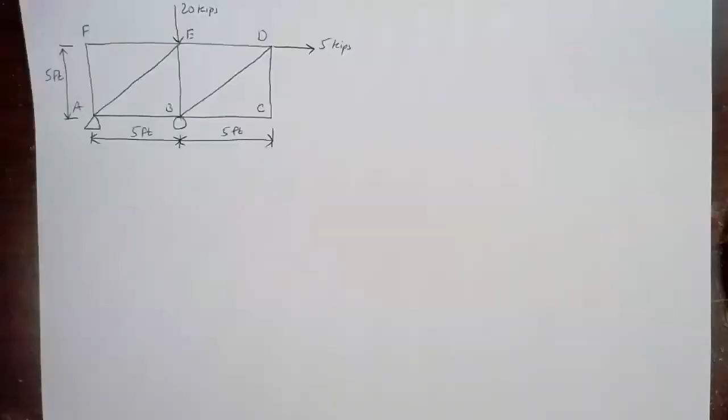Now, this kind of truss we've got set up with our supports in maybe different locations than you're used to seeing. Usually we see one support on one end, one support on the other, but the supports can be anywhere. That was part of the lesson of the 2 problems I had on last Wednesday's practicum. Here we've got our roller support in the middle, and that's okay. The pin support and the roller support will hold that truss even though we have this cantilevered section, a section that is sticking out beyond the support, and that's okay.

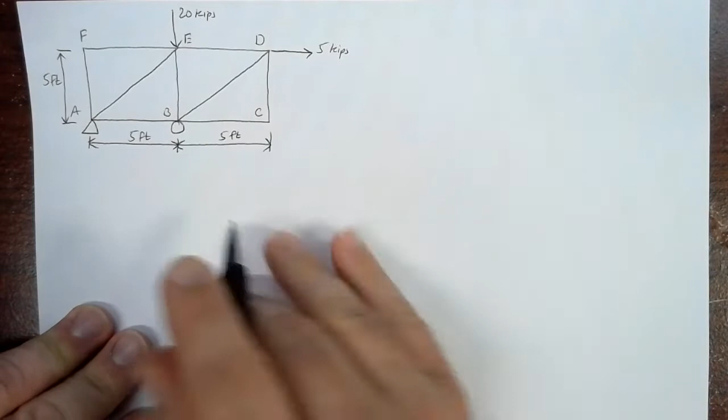We analyze it exactly the same way. Now there are a lot more joints than we have had in other truss problems, but we'll find that several of these members are going to be unloaded. And we'll be able to, by picking the right joints to go to in solving our method of joints, make pretty quick work of the problem.

So first, let's solve the external problem by drawing our free body diagram. So in our free body diagram, we're going to have the truss repeated again.

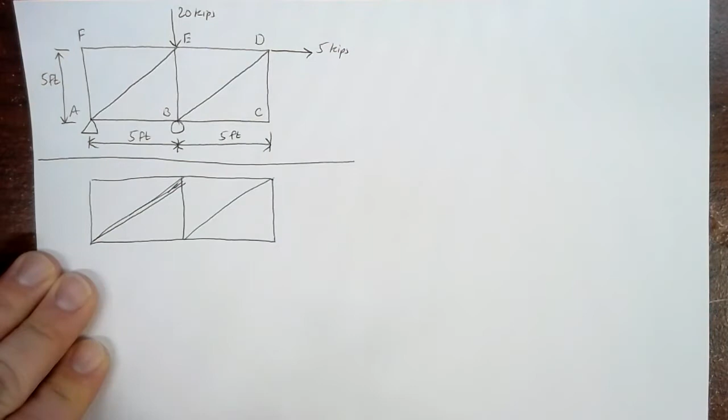But we're treating the truss as essentially a solid object. We are not worrying about the internal structure at all. All we have to worry about are the external forces, the fact that that pin support supplies 2 forces, RAX and RAY, and that the roller support supplies a single force, and that we have these 2 external forces.

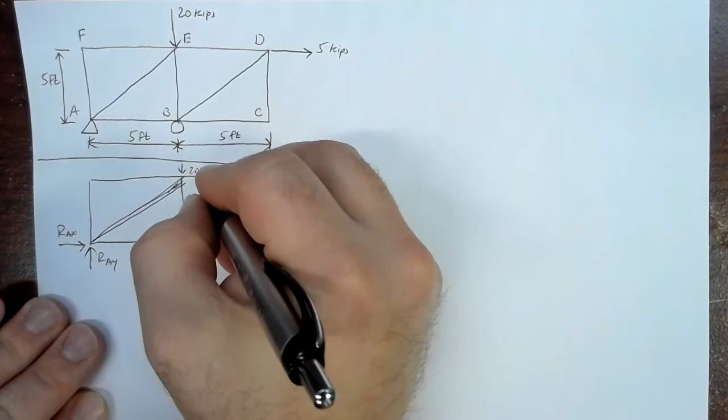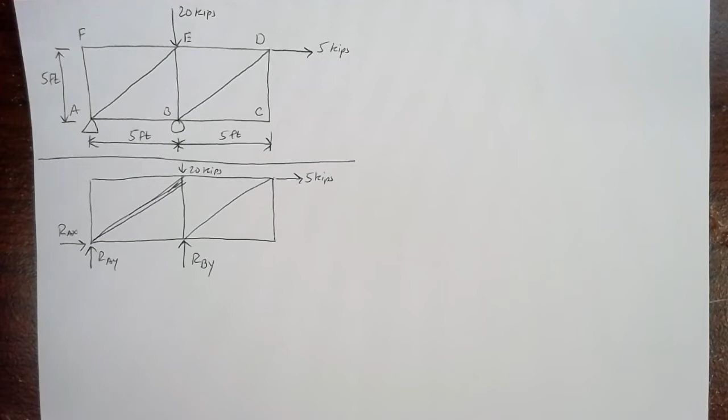We have the 5 kips pulling to the right, and we have 20 kips pushing down. Those are all the external forces. We'll figure out the internal forces, the forces on the members, when we look at the actual joints.

So let's do our external problem. This is a non-concurrent force problem, so we have 3 sums that we can work with: the sum of forces in the x direction, the sum of forces in the y direction, and the sum of moments about a point.

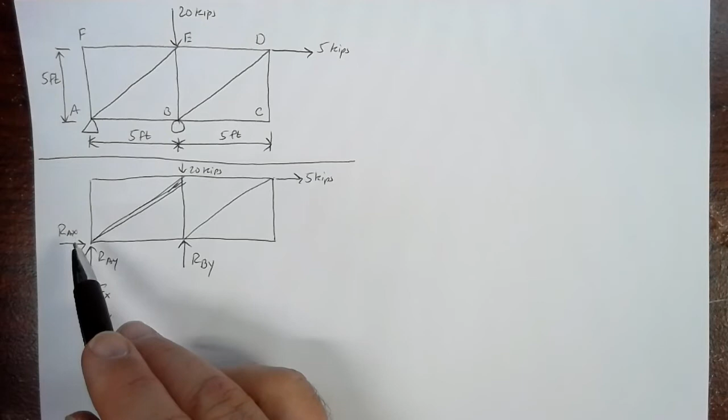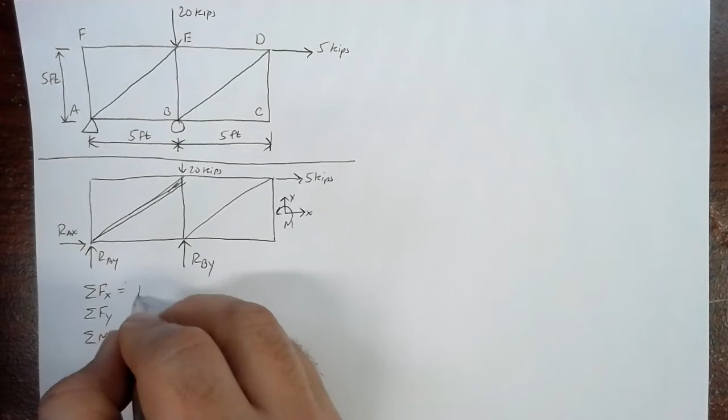For our sum in the x direction, looking through the truss carefully, we've got RAX to the right, and we can define our coordinate system to make sure we're clear on our directions for positive. X is positive when it's to the right, Y is positive when it's up, and counterclockwise moments are positive. So a force in the x direction, we've got RAX, and that's to the right, so it goes into the sum as positive. The only other force in the x direction is this 5 kips, and that's also to the right. So we'll put that in as a +5.

In the y direction, we've got RAY up, so a positive RAY. We've got RBY up, so a positive RBY, minus 20 kips, because that 20 kips is pushing down.

And then we've got to find our moments, and in order to find the moments, we need to pick a pivot point. Joint A is, again, not a bad choice to pick. One of the supports always works out to be a good place to pick your pivot point. A works out nicely because it means that RAX and RAY will generate no moment. We're only going to have moments from 3 forces. RBY has a moment, the 5 kip force has a moment, and 20 kip force has a moment. So let's work each of those in turn.

Let's take the 20 kip first. That 20 kips has a line of action that is 5 feet away from A. So its arm is 5 feet times 20 kips. The 20 kip force acting alone would cause everything to rotate clockwise, and clockwise moments are negative. So we have a negative 5 feet times 20 kips.

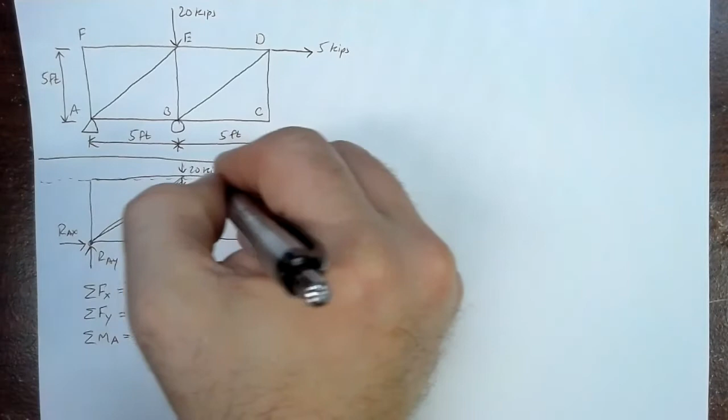The line of action of the 5 kip force is that horizontal line right there. That distance between the pivot point and the line of action, measured at a 90-degree angle, is 5 feet. So we have a 5-foot arm for that 5 kip force.

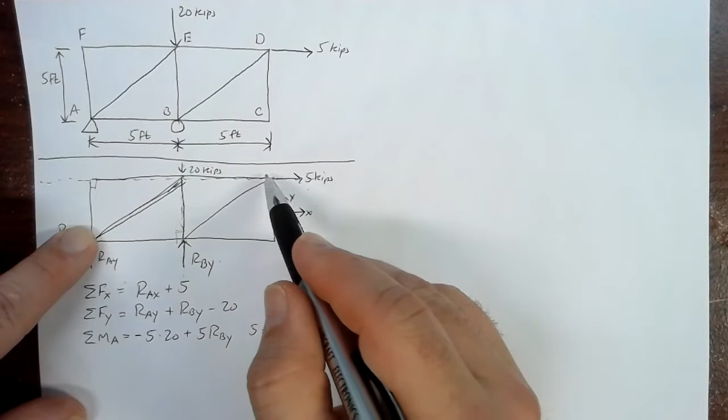Acting alone, if we pin the truss at A and pull with the 5 kip force, that would cause a clockwise moment, and clockwise moments are negative. So there we've got our sums. Now, if this truss is in equilibrium, the sums add up to 0, which gives us a set of equations we can solve.

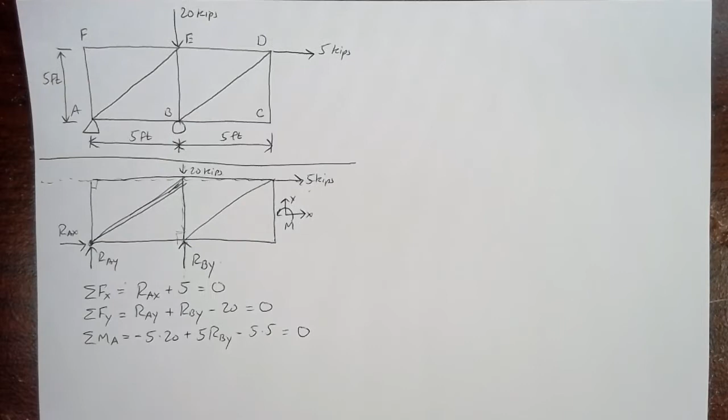So let's shift this up a little bit so we can solve those equations.

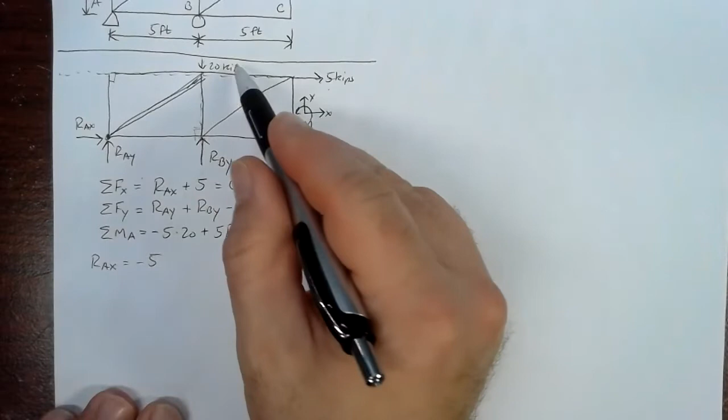Going to the x direction equation, we've got something relatively easy to solve. We subtract 5 from both sides, and that tells us RAX equals negative 5. Don't forget your units, since all of our forces are in kips. In this problem, we'll use kips.

Now, something important to notice here: this came out negative. That means we assumed the wrong direction for RAX. I assumed in my free body diagram that RAX was to the right. The fact that it came out negative tells me my assumption was wrong, that I should have assumed it was to the left. So that just means I've got 5 kips to the left. So up in my summary, I'm going to write RAX is 5 kips to the left, using a left pointing arrow to represent that.

The y direction equation we really can't solve just yet because we don't know RAY or RBY. But we can solve the moment equation. Let's run the numbers on it first here.

Negative 5 times 20 is negative 100, plus 5 RBY minus 25, that equals 0. If we combine the numbers, we get 5 RBY minus 125 equals 0. If we add 125 to both sides, we get 5 RBY is 125, and dividing both sides by 5, RBY comes out to be 25.

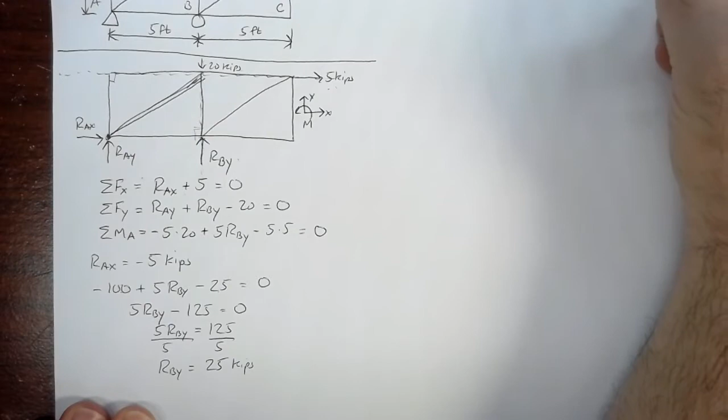So RBY is 25 kips, and that is positive. So our assumed direction for RBY is correct. I'll add that to my summary table: RBY is 25 kips up.

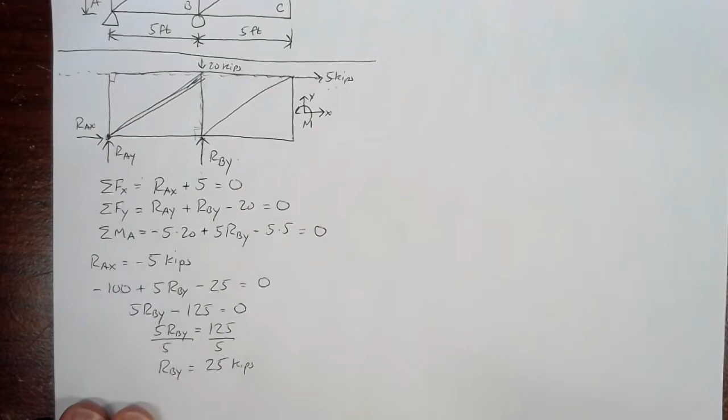Now that we know RBY is 25, we can go back to our y direction equation. We had our x direction, we had our moment equation, now we've got our y direction equation. It says that RAY plus RBY minus 20 equals 0. If we plug in that RBY is 25, we have RAY plus 25 minus 20 equals 0.

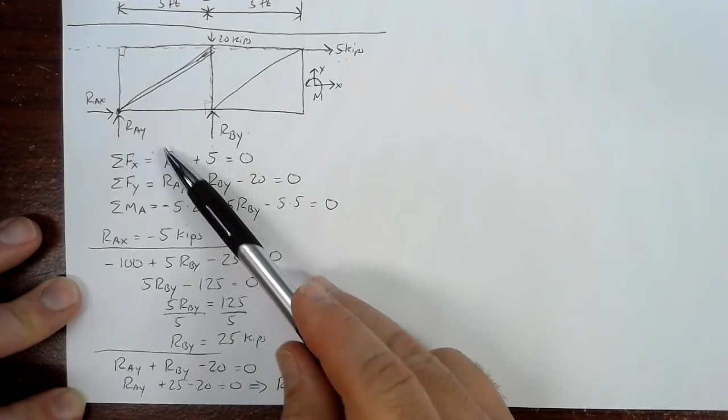If we solve that, 25 minus 20 is positive 5. Subtracting 5 from both sides, RAY comes out negative 5 kips. That means our assumed direction for RAY is wrong. We assumed that the reaction at A had to point upward, pushing the truss up.

But in reality, it's got to pull downward. That's the effect of this 5 kip force over here. This 5 kip force is trying to rotate everything around B, and that's causing this end of the truss to try to rise. The support has to pull down to keep the truss from moving.

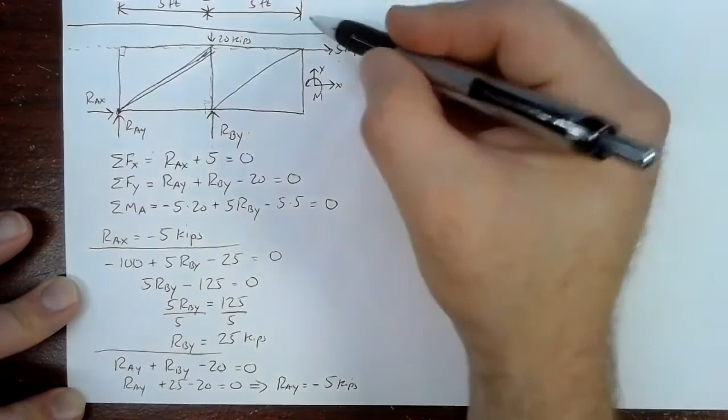Think about this kind of like a long diving board. You've got two supports, a pin on one end and a roller in the middle. Somebody stands on the end or pulls on the end. The pin support has to pull down to keep everything from rotating around B. It'd be even worse if I had a force pushing down out here. So RAY should be 5 kips down. I'll write that in my summary, which I'll show you in just a second.

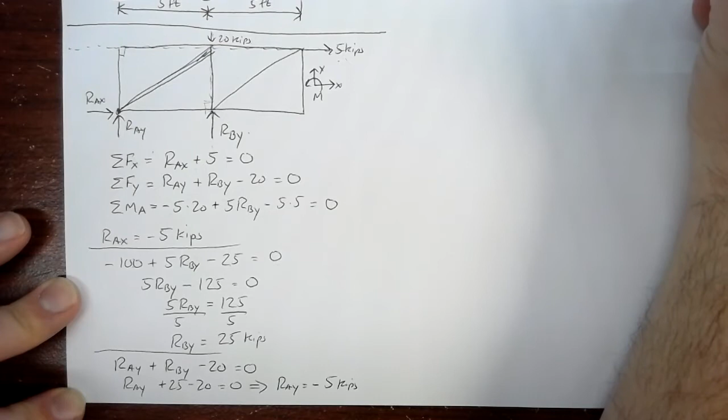So scroll back over here. There's my summary in the upper right corner. I've got my reaction forces from the external problem. RAX is 5 kips to the left. RAY is 5 kips down. And RBY is 25 kips up. So there's our external problem.

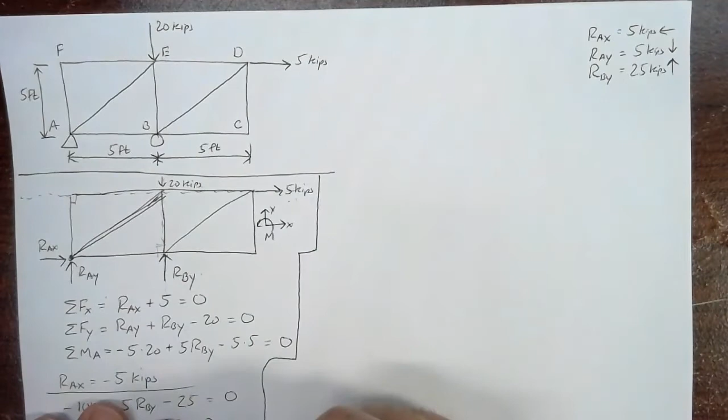So let's line that out. Now our goal in the end here is to be able to fill out a table showing what each of the members experiences as a load and whether that member is in tension or compression.

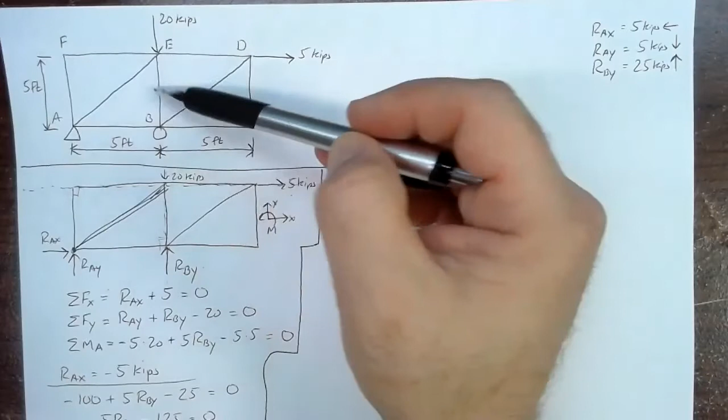Now we've got to count up how many members we've got here to be able to write up our table. Here we've got 1, 2, 3, 4, 5, 6, 7, 8, 9 members. So that's a pretty intense truss. There's lots of members to deal with there. We've got 9 rows in our table. So let's write up the table here.

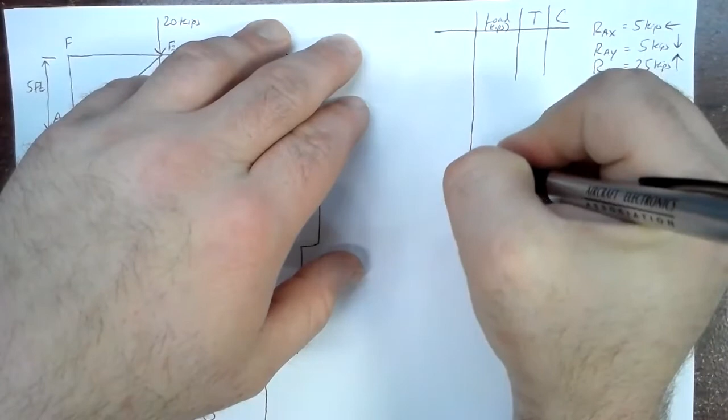We need to know how much load there is in kips and whether or not we've got tension or compression. And we need enough space for 9 rows. Couple more.

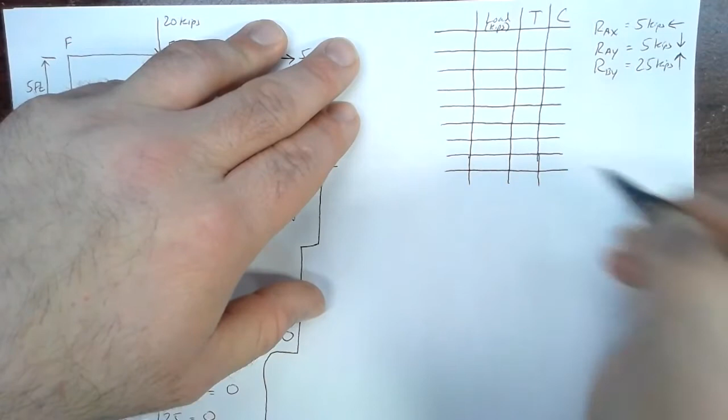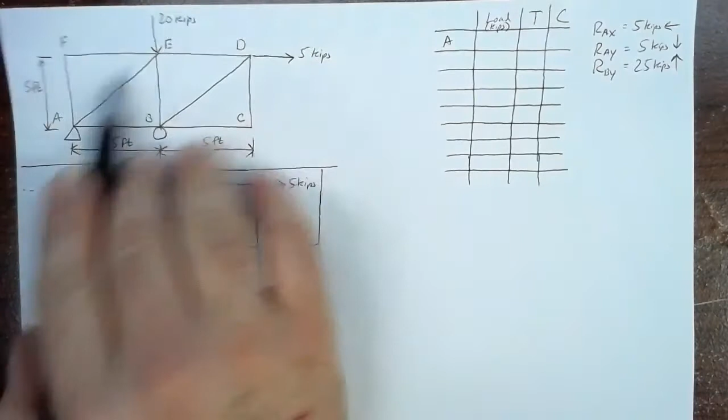We've got to label out our members, and I like to just go in alphabetical order, so I'll start with A. Now A connects to B, E, and F, so I'll have AB, AE, and AF. No more at A, so I'll go over to B. B connects to A, but we've already got that. We've got BE, BC, BD. So BC, BD, BE.

And then we go over to C. We already got BC. We need CD. At D, we've got DE. And then at E, we've got EF. So there we go, all 9 members.

So that's what we're going to want to fill in here at the end.

So we figured out the external problem. We know what's going on outside the truss in terms of its supports. And it's not a bad idea to be really clear about this at this stage before you jump into the truss and start working on the joints. Redraw this free body diagram over here, but fill in the right directions and the right sizes for your reactions. So I'm going to do that here.

I've got the original truss, external forces, 20 kips and 5 kips. And then, according to my summary here, I had 5 kips to the left and 5 kips down. And I had here at B, 25 kips up.

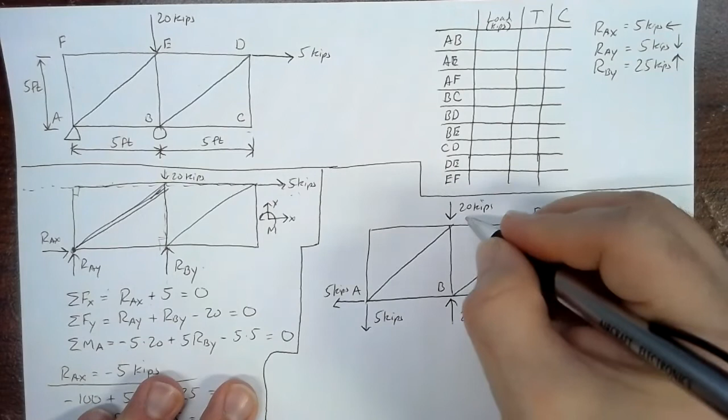That way we've got a good look at what's happening at each joint, filling in all the information that we've got to this point. That'll help us in making our free body diagrams of the joints.

So in method of joints, once we've figured out the reactions, we need to look at the truss on a joint by joint basis. But remember that at a joint, we can only handle 2 unknown quantities. Now, your initial instinct is probably to try to start at A, but there's a problem with A. Although we've got 2 known forces acting at A, we have 3 unknown forces. We can't handle 3 unknowns at a single joint.

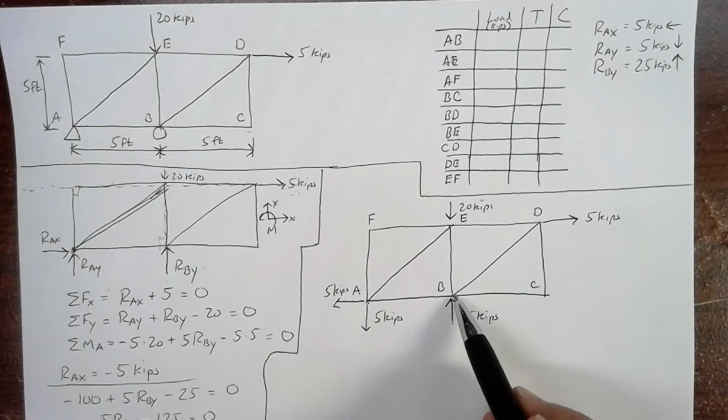We can only handle 2 unknowns. So you might say, well, okay, I can't do A, so go over to B. Well, B is even worse, because although we have 1 known force, we've got 4 unknown forces. D and E are the same. We've got more than 2 unknowns. The only viable places to start on the analysis of this truss will be at joint C and joint F, because those are the only ones that have 2 and exactly 2 unknown forces.

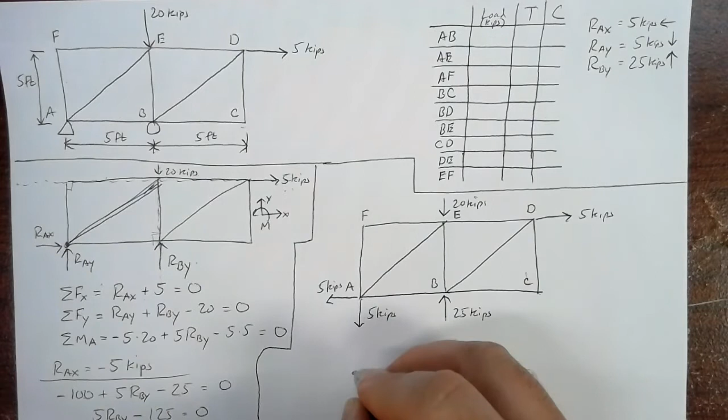So let's start at C. So we'll draw the free body diagram of joint C. So we'll label that here, joint C. And I'll scroll up a little bit here to bring more of it into view. So joint C, it's right here. Draw that little bubble around joint C. Anything that crosses that bubble needs a force in the free body diagram.

So we've got 2 forces here. We've got the force due to member BC, which I'm going to assume is pushing joint C to the right. Sometimes if you're not clear, or not sure what the direction of the force will be, just take a guess. It doesn't matter really in the end. The math will tell you if you guessed wrong by giving you a negative answer. Negative answer just tells you you've got your direction wrong.

Then we've got joint or member CD. And I'm going to assume that member CD is pushing down. And that's it.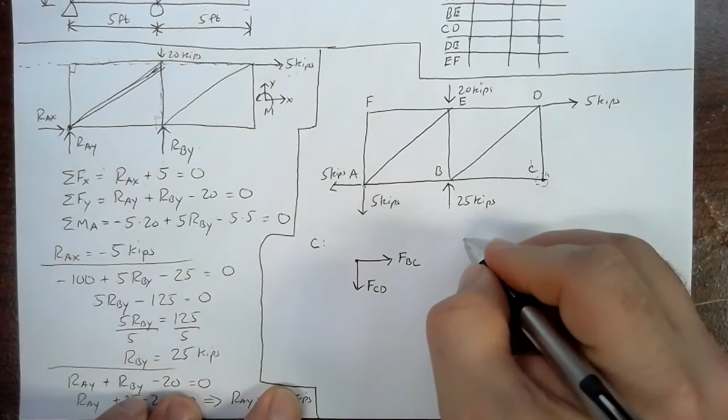Now at a joint, we have a concurrent force problem, so the sum of forces in the x direction and the sum of forces in the y direction are 0. So let's work them out. Sum of forces in the x direction, we have FBC and nothing else. The sum of forces in the y direction, we have a negative FCD and nothing else.

In equilibrium, those sums must be 0. It's the only way we can have equilibrium. Well, that gives us immediately what our values must be for members BC and CD. Since those are the only forces acting in the x and the y direction respectively, and those must be 0 to be in equilibrium, each force must be 0. The only way this picture could be in equilibrium is if those forces were 0, because there are no forces to counteract them. That means that member BC and member CD both carry no load.

You might ask, well, why bother having them in the truss at all? Well, under this particular situation, they aren't doing anything. We could actually delete them, cut them away from the truss and not have any problem. But there might be other loadings where those truss members are important.

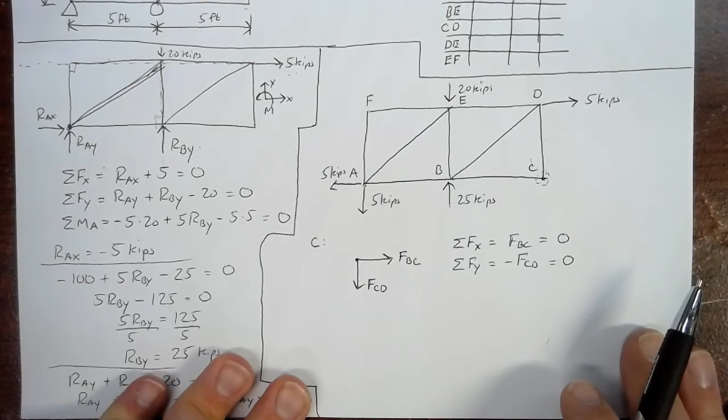Those are 0 whenever there's no load applied at C. But if we happen to be able to apply a load at C, that will change the loading in members BC and CD. So just because a member shows up with no force doesn't mean it will always have no force in all the possible applications of that truss.

So let's go back to our table here now that we've figured that out. Member BC carries no load, so we can put that in there. And if a member carries no load, you can't really say whether it's in tension or compression. Member CD also carries no load. So that's the analysis of joint C.

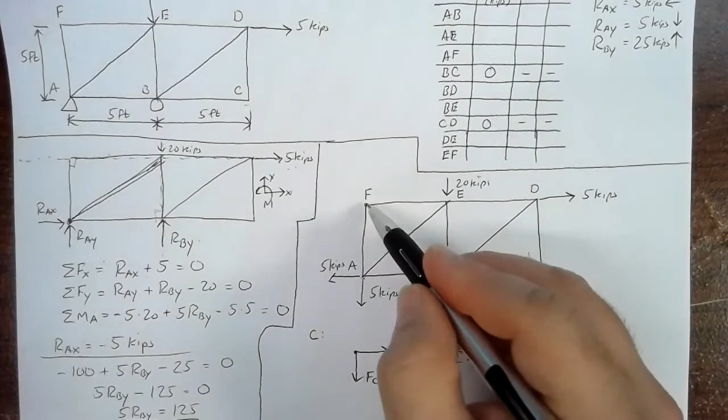Now, if you got the idea down here with joint C, you might see that joint F is going to work out basically the same way. At joint F, we have two unknown forces. One's either pushing or pulling up or down. The other is pushing or pulling left or right. When we draw the free body diagram, we're going to end up with something like this, which means that member AF and member EF will also have no load. So we can fill that into the table as well.

So right away, 4 out of our 9 members have no load on them. That also helps us out as we move on to some of the other joints.

For example, if we go back to joint A now, we only have 2 unknown forces because member AF doesn't have a load on it. We already know what that is. We can essentially remove it in the free body diagram. All we've got as unknowns would be member AE and member AB. So in drawing the free body diagram of joint A, we're only going to have 2 unknown forces.

We will need that angle, but fortunately that angle is not too hard to find out. If we use this right triangle here and notice that we've got 5 feet up and 5 feet over, inverse tangent of 5 over 5 is going to be 45 degrees. So the angle's not too bad to worry about.

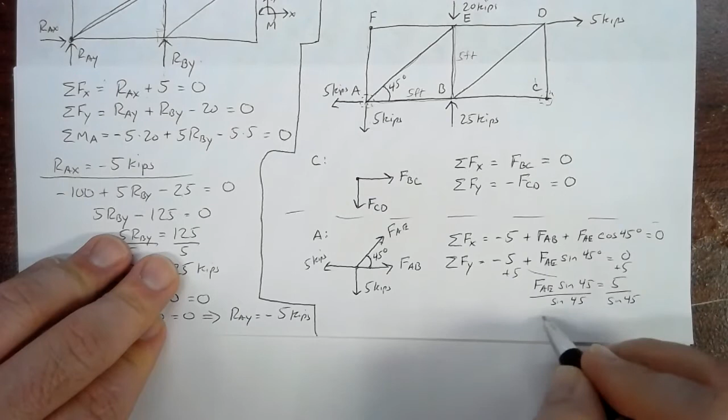And FAE has a value of 7.0711 kips. So FAE came out positive, which means our assumed direction is correct. And that'll be important in a few seconds when we figure out whether this is in tension or compression.

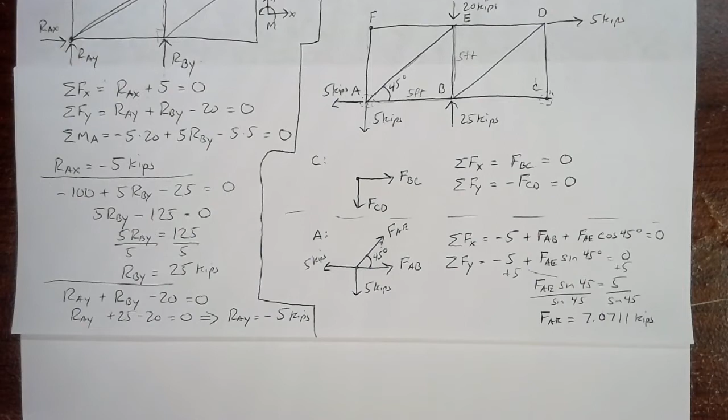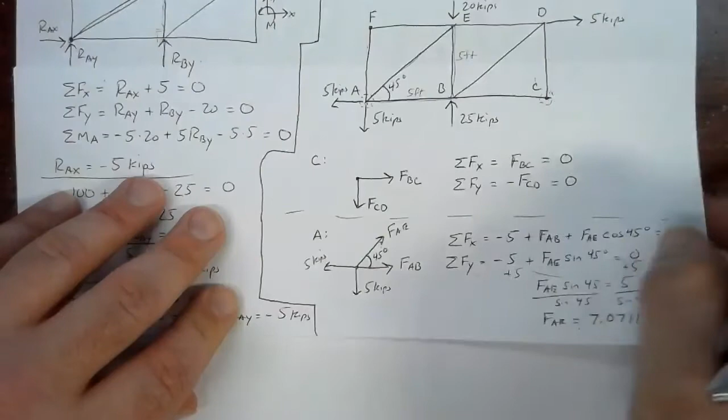Now that we know AE, we can go back in and figure out what value we have for AB. So let's go on to another sheet here.

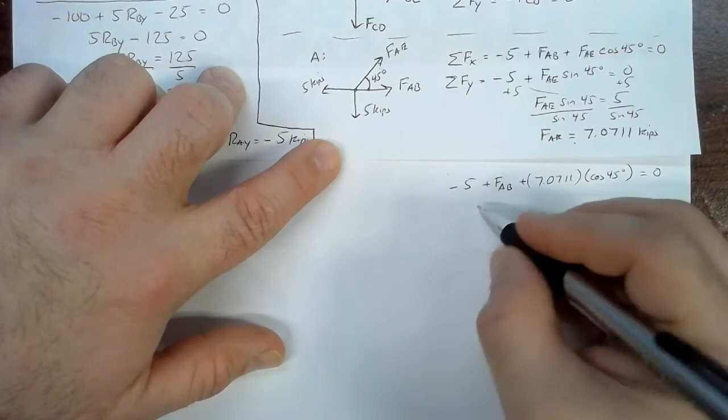The sum of forces in the x direction, we had -5 plus FAB plus 7.0711 times the cosine of 45 degrees, and that equals 0. So if we take 7.0711 times the cosine of 45, that gives us 5.0000. So we have -5 plus FAB plus 5.0000 equals 0. And here I'm keeping 5 sig figs in the calculation.

That'll give me enough to have 3 good sig figs in the end for my final summary. You have -5 plus 5, that's 0. So FAB ends up being 0. Member AB in this loading doesn't carry a load.

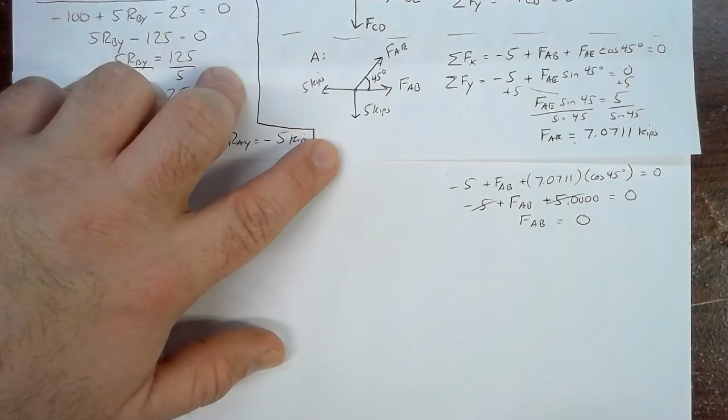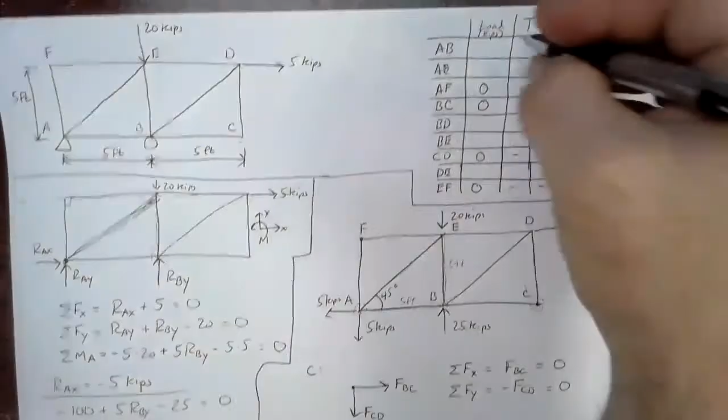So let's go back to our table and fill in what we know. Member AE carries a load of 7.0711. We have to figure out whether that's tension or compression.

Well, the way to figure out tension or compression is to look at the force in relation to where the member is. So if we look at joint A is right here. Member AE is up and to the right. So I'm going to sketch that in kind of like this. Member AE is up and to the right.

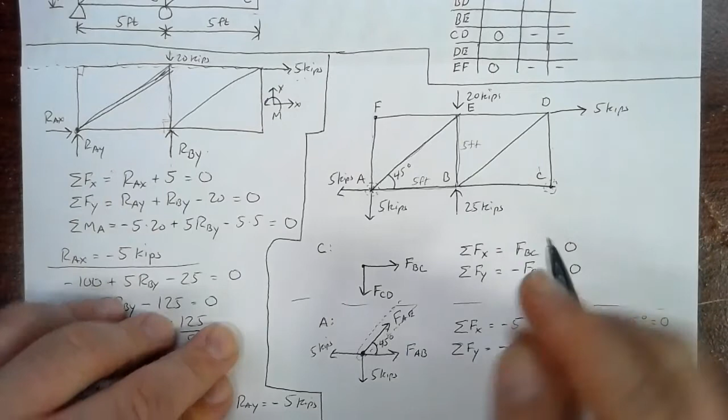Joint A is being pulled toward the middle of member AE. And we saw in the first problem video that I did that if the joints are being pulled toward the middle, that's a sign of tension. Member AE is in tension because it's pulling the supports in toward the middle. It's trying to shrink back to its original size. So it's pulling those joints inward. So member AE is in tension.

So we can check the box there. Now we found out that member AB carries no load. So we can fill that in, no load, and no tension or compression. So now we're down to 3 members left. And only one member so far is carrying any load. Member AE is carrying 7.0711 kips.

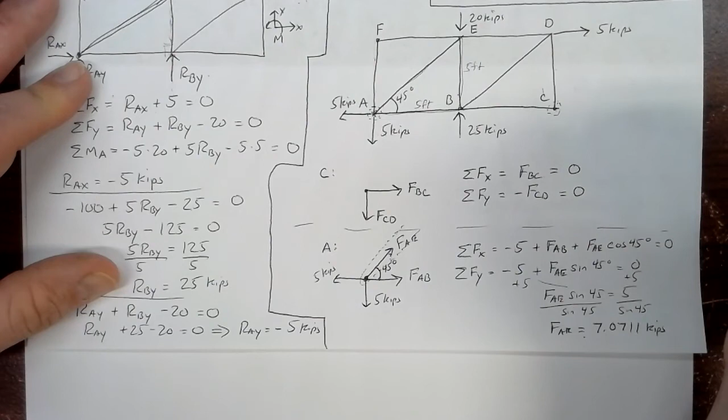So let's go to joint B. Now at joint B, I've got 4 members connecting there, plus I've got this 25 kip force. Member AB, however, doesn't carry a load. Member BC doesn't carry a load. So what I've really got here are only 3 forces. I've got 25 kips pushing up. I've got some force from member BE and some force from member BD.

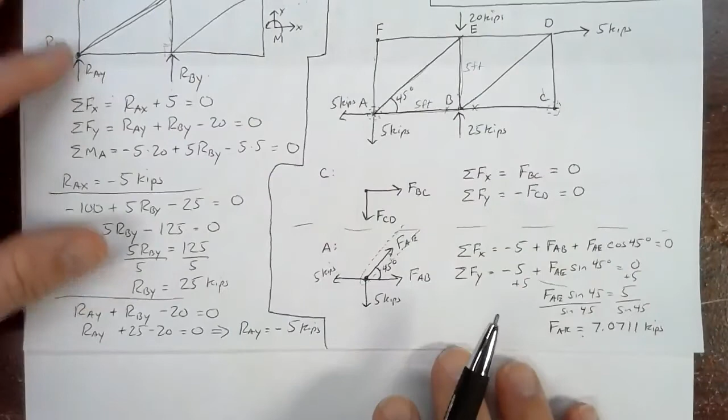So let's draw the free body diagram for that. So free body diagram for joint B. So here's joint B.

We have a 25 kip force pulling up. We've got some unknown force due to member BE. I'm going to assume, just for clarity, that it's pushing down, because otherwise I'd have two forces on top of each other, and that gets problematic in drawing out the free body diagram. So I'm just going to assume member BE pushes joint B down.

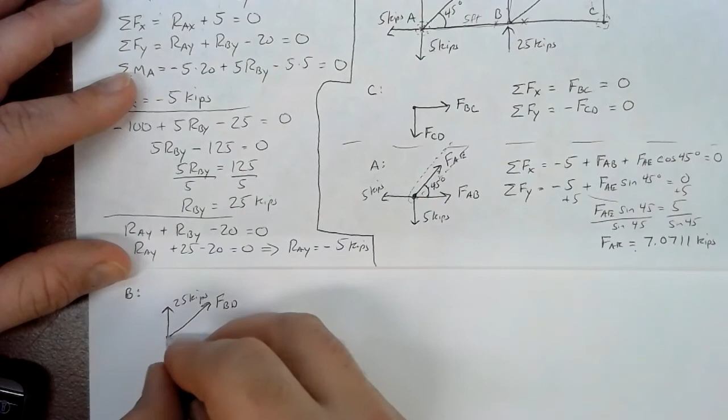And then I've got member BD. Member BD, I'm going to assume, goes up and to the right. That one's at an angle, but since the sides are all 5 feet here, the angle's got to be 45 degrees.

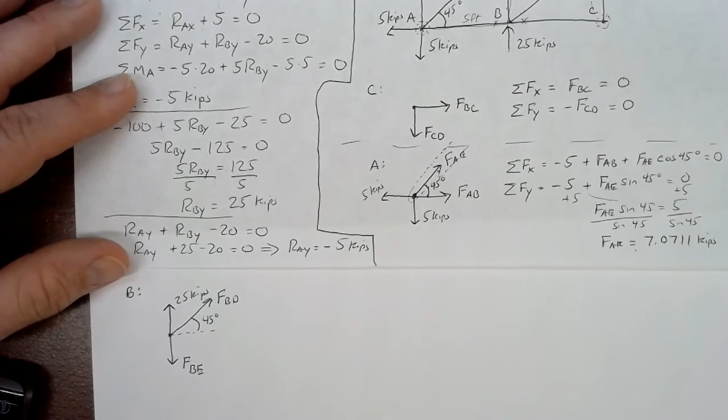So there's our free body diagram. I'll try and lay this on top here so that we can keep an eye on the full truss and the free body diagram that we're doing. So there's our free body diagram for joint B.

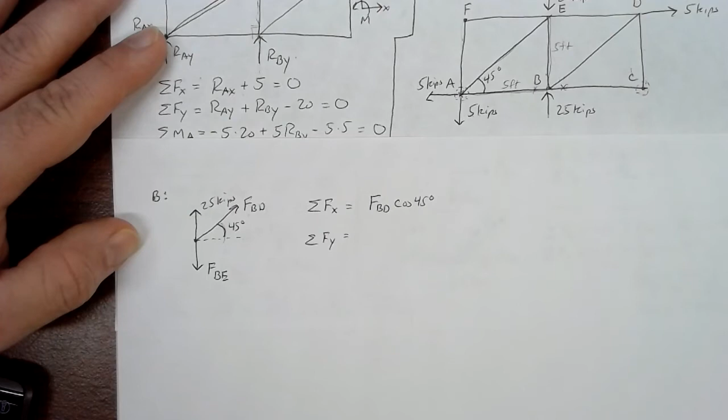Let's do our sum of forces in the x direction and our sum of forces in the y direction. In the x direction, we've got a piece of FBD, the horizontal component. Horizontal here is the adjacent side, and adjacent goes with cosine. We have nothing else in the x direction, just that piece of FBD pulling to the right. It's positive because to the right is positive.

Then we've got our sum of forces in the y direction. We've got all of FBE down, plus we've got 25 kips up, plus the vertical piece of FBD, that's the opposite side or sine, 45 degrees.

So our sum of forces in the x and y directions both must equal 0 in order for the joint to be in equilibrium. If we look at the x direction equation here, that's telling us that FBD times some number equals 0. Now cosine of 45 is 0.70711. It's not 0. The only way you could multiply some number by something that's not 0 and get 0 out of it is if that unknown value is 0.

You could also look at it as dividing both sides by cosine of 45. 0 divided by anything other than 0 is 0. So FBD is 0. Member BD is unloaded. In this problem, in the way that we've loaded this truss, member BD does not carry any load. That's good news, because when we go down to the y direction equation, that means this whole term goes away, because FBD is 0, 0 times anything is 0.

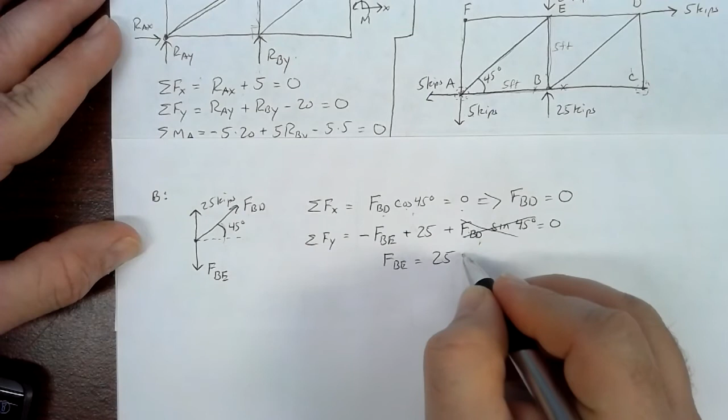That leaves us with a much easier equation to solve. Negative FBE plus 25 equals 0, which if you add FBE to both sides, just says that FBE is 25 kips. So member BE carries a load of 25 kips, and it came out positive.

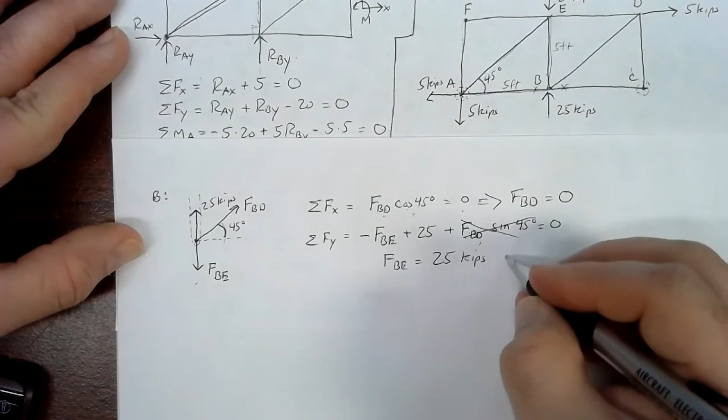That means that we assumed the correct direction. Now, to figure out whether that's tension or compression, we have to look at where member BE is compared to joint B. Member BE is up here above joint B, and it's pushing the joint away. When a joint is pushed away, that's a sign of compression. So member BE carries 25 kips of load in compression.

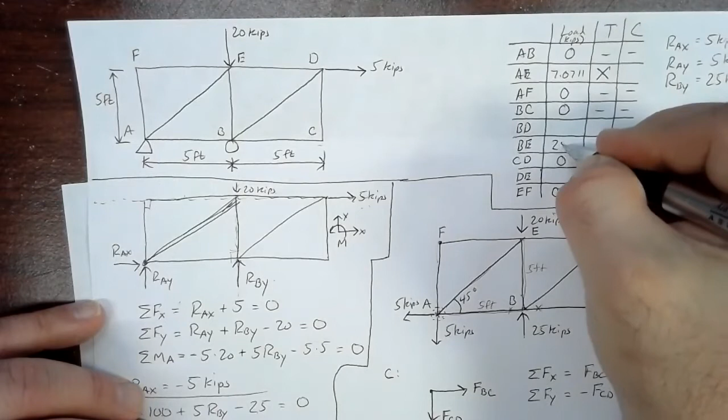So let's go back to our table and fill that out. So member BE carries 25 kips of force in compression, and we found out that member BD carries no load.

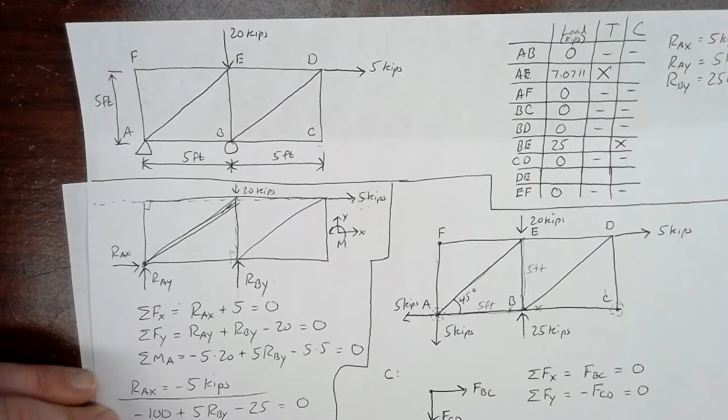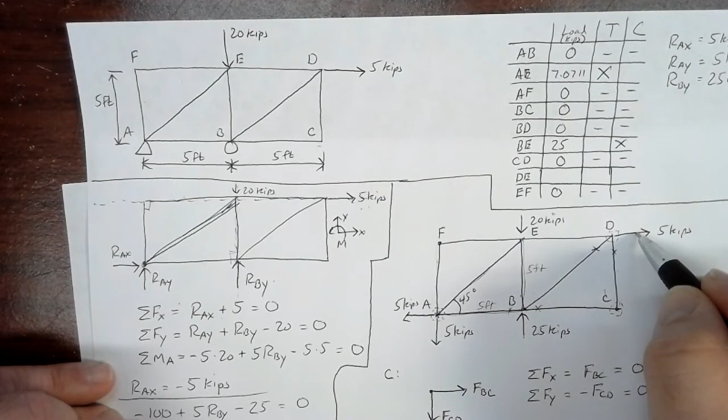So there we are, down to just one unknown, member DE. The only place we can really go to get member DE would be either joint E or joint D. Now at joint D, there's no force due to member CD because that doesn't carry any load. There's no force due to member BD because it doesn't carry any load. The only forces at joint D are the 5 kip external force and the force due to member DE.

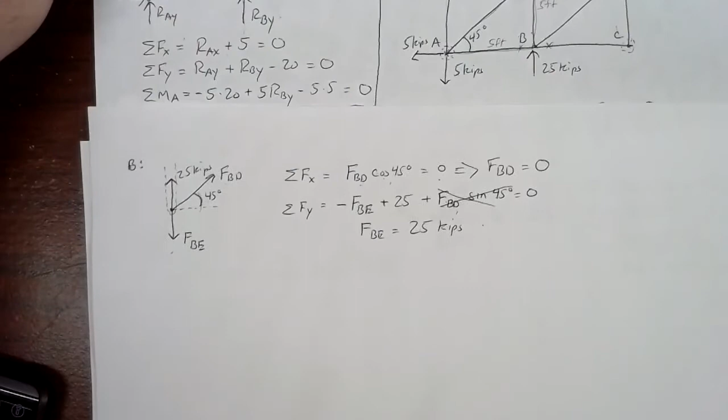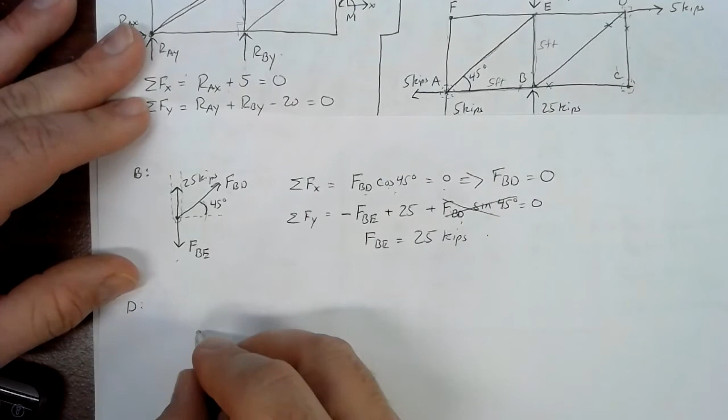So the free body diagram is going to look relatively simple for joint D. We've only got 2 forces. We have 5 kips to the right, and we've got member DE's force, which I'm going to draw to the left.

Well, there, obviously, we can't do a sum of forces in the y direction, or at least it wouldn't be very informative. It would just tell us that 0 equals 0. So let's do our sum of forces in the x direction. In the x direction, we've got a negative FDE and a positive 5. And to be in equilibrium, that must add up to 0.

Solving that equation, pretty easy. FDE equals positive 5 kips. Now to figure out whether that 5 kips is tension or compression, look at where the member is physically.

Joint D is right here. Member DE is to the left. So member DE is over there, and the force due to member DE is pulling to the left. Came out positive, so we know we've got that direction right.

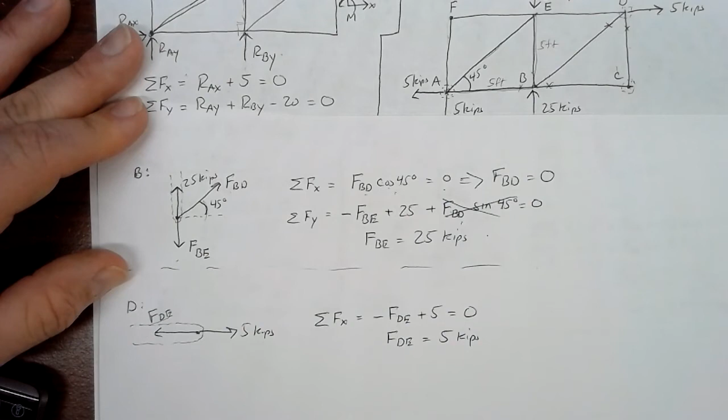The force is inward toward the middle of the beam, and when forces are inward, that's a sign of tension. So when a member is in tension, it pulls the joints in toward the middle. When it's in compression, it pushes the joints away. So we've got a member in tension.

So we can go back to our table and fill that in. Member DE carries 5 kips of force in tension.

To summarize everything, we draw a summary diagram, which looks a lot like what we've drawn here, except each member will have labeled on it how much force it carries.

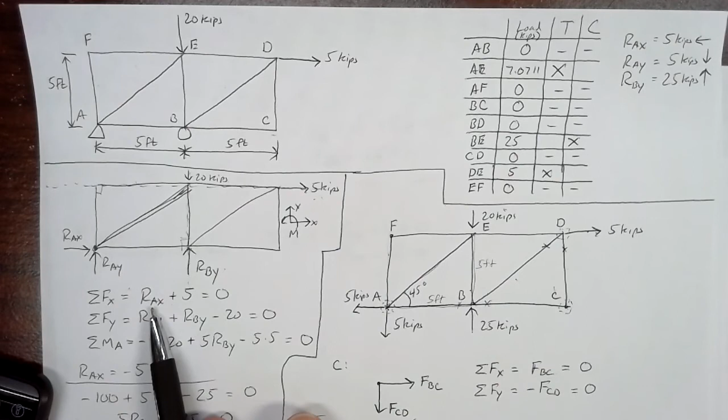But before we do that, let's look at how the load is transmitting through this structure. There's some things we can learn here just by looking at what we call the load path. Here we've got 5 kips pulling to the right. If you remember way back to our external problem, that 5 kips pulling to the right made RAX carry 5 kips to the left. How did it get there? Well, it did it by pulling on member DE, putting member DE into tension.

So member DE pulled on joint E with 5 kips of force. Now member EF and AF, they didn't carry any load. The only way that force could have gotten down here was to go through AE. So remember, AE is carrying a good bit of that force. That 5 kip force is part of that 7.0711 kips that AE carries due to that 5 kips.

So we've got 5 kips of force pulling on DE, and that pulls on AE, and that's what puts AE into tension. Now, when you take the angles into account, the 45 degrees and 7.0711, that gives us the 5 kips. So in this case, we're getting a load through down to there. That's our load path for that 5 kips getting down to here.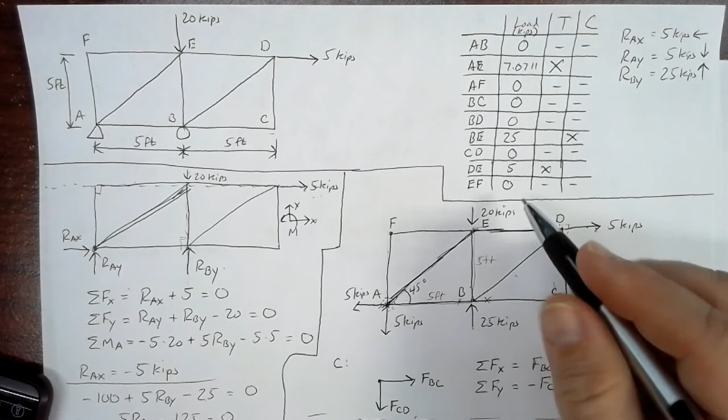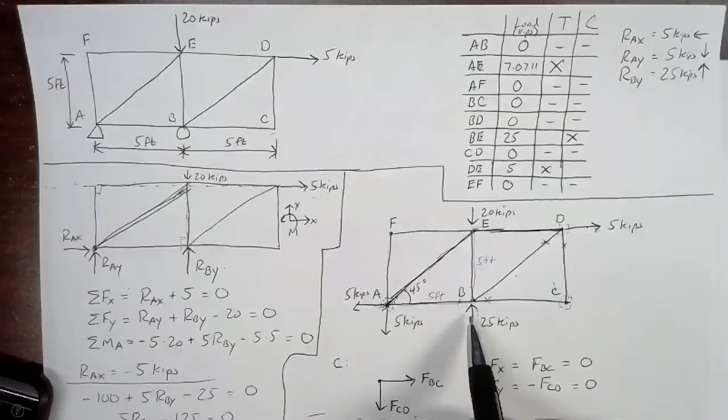The 20 kips is mostly being supported on joint B. So 20 of the 25 kips that we've got here are from joint E and the force applied to it. The other 5 kips pushing up here is a result of the rotation that this 5 kips is trying to do of the structure around A. It's trying to rotate the whole structure around A so that B has to push up a little bit harder. So that's a little bit of insight into where those forces are coming from in the truss.

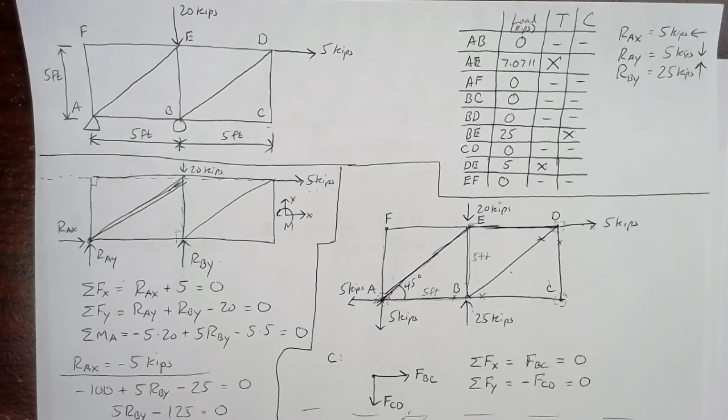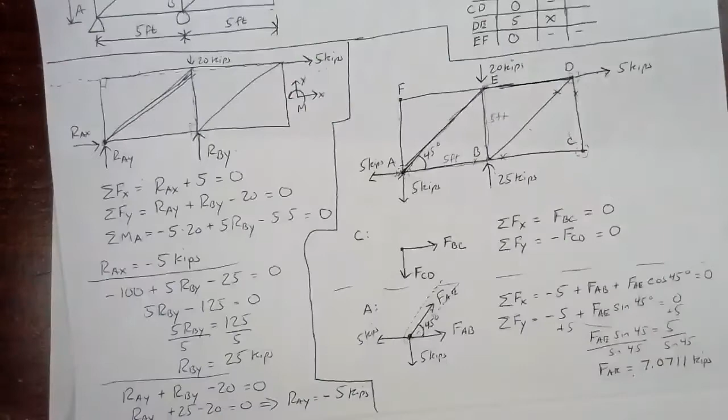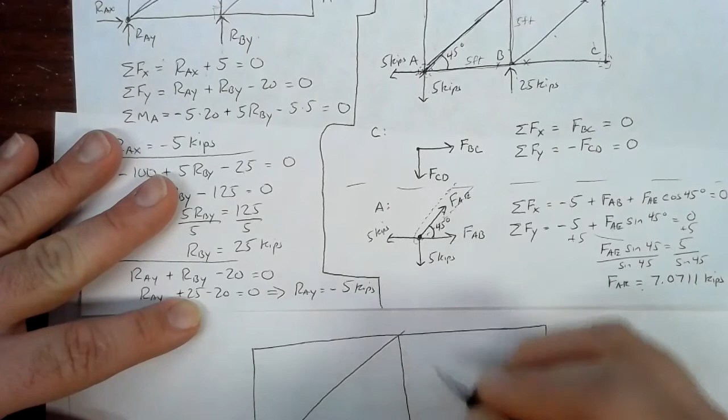So let's draw our summary diagram and wrap this problem up. We start out with the drawing of a truss. Let's draw it out like this, make it a little bigger. We don't really have to put any dimension information on there, but the members and the joints should be clearly labeled. Remember, this is more about communication at this point than about calculation. So you're going to fill in all the letters.

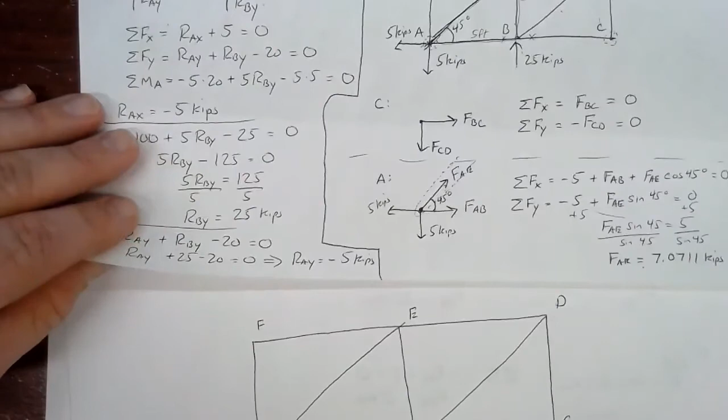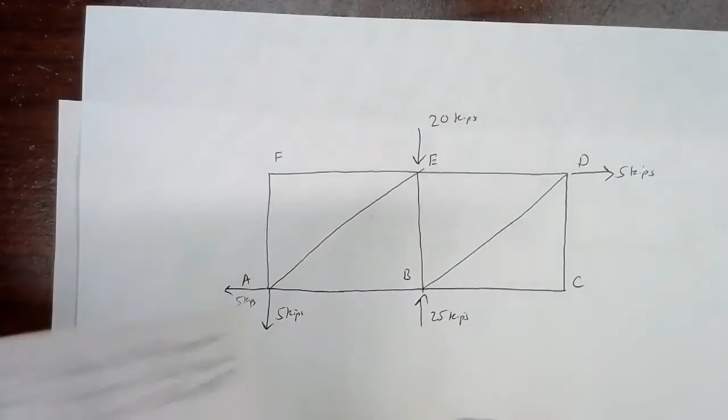Fill in your reaction forces. So we had 5 kips and 5 kips, making sure those directions are right. We had 25 kips here, our 5 kip and our 20 kips external forces. Now going based on our table, let's try and get this arranged so I can put it all in the same place. That'll do.

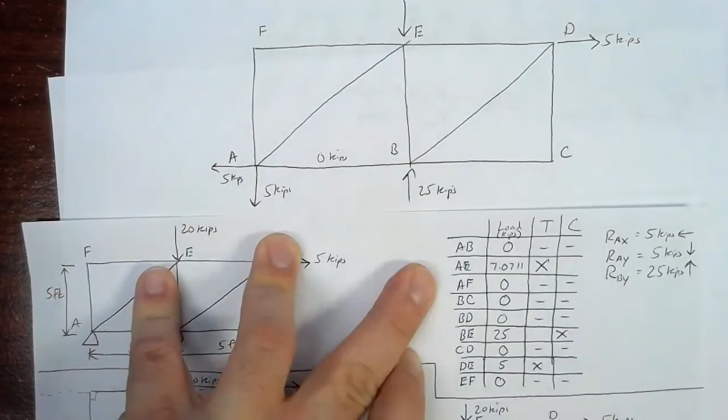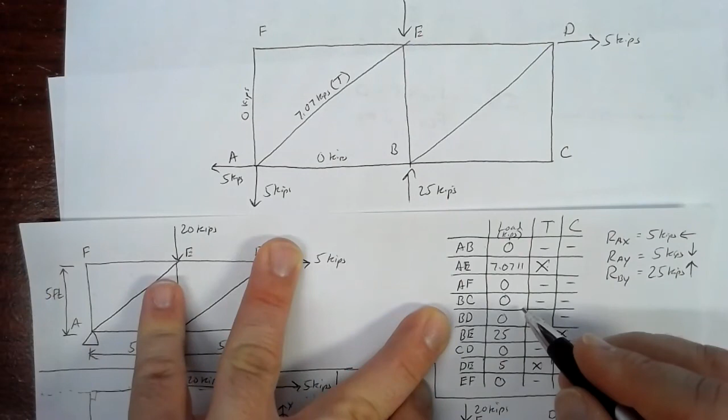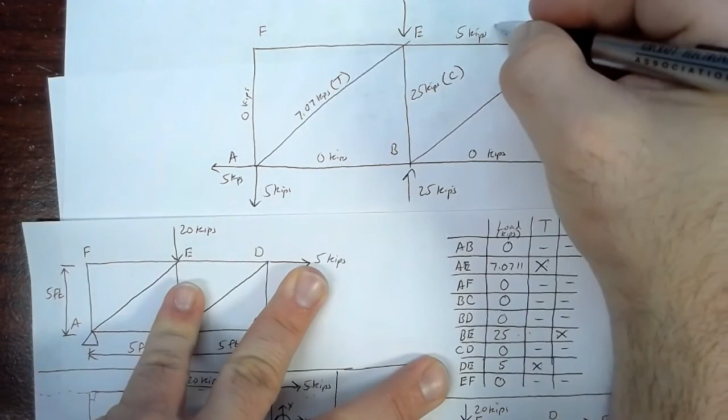So going based on our table, we can just go down the line. AB carried 0 kips. AE carried 7.07, rounding to 3 sig figs, in tension. Member AF carried 0 kips. Member BC, 0 kips. Member BD, 0 kips. Member BE, 25 kips in compression. CD, 0 kips. We've got DE with 5 kips in tension, and EF, 0 kips. So there's our force summary diagram.

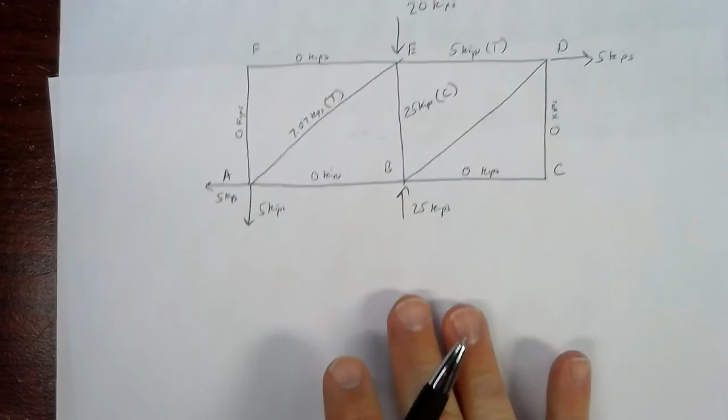Everything that needed rounding has been rounded to 3 sig figs. Everything else is exact; we didn't have to do any rounding to get to those values. So it's okay to leave those as 5 kips, you don't have to go 5.00. It's really only when you round that you have to worry about sig figs. Here we didn't round to get those reaction forces; we had 125 divided by 5, things like that, for our 25 and our 5 kips. So that's a perfectly fine force summary diagram. Only 3 members out of the 9 had any load on them.